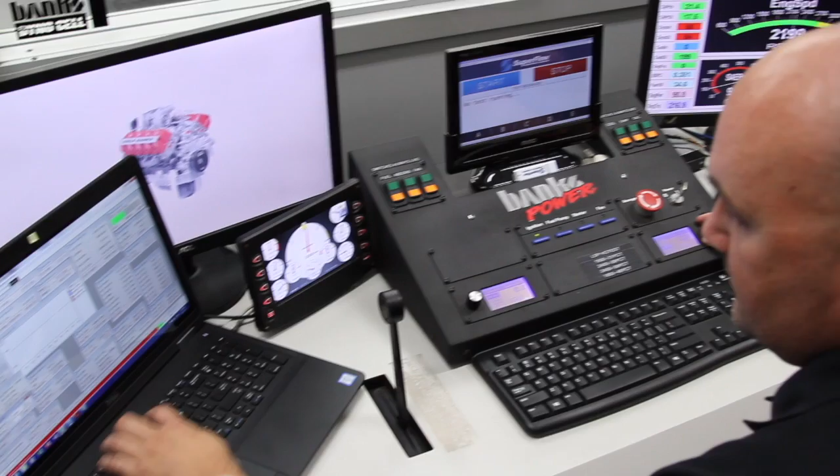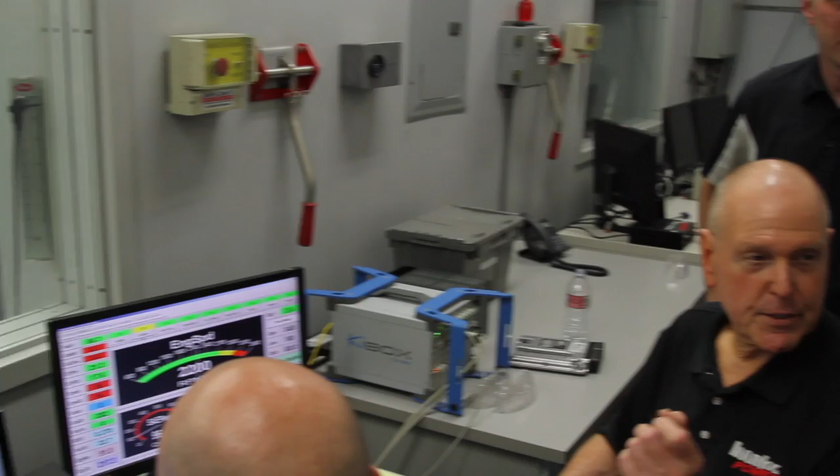We're going to run this sucker at full song. This is an L5P. We're going to run it at full song, add 2 degrees of timing, see what kind of change in cylinder pressure we get, what kind of change in turbine inlet temperature, discharge, and where the peak cylinder pressure occurs. Yes, that's where the location deal is. As we advance, we're looking at EGT. Is it going up? Is it coming down? Does it like it? Right. And it'll tell us in a variety of ways.

We're going to do it with constant fuel rate and just move the timing around and kind of watch how everything reacts to that. I mean, you're going to get to be a dyno operator for a day. No worries, Aaron. And you get to do it the rest of the time, but we want to see what it's like, man. And we're at 2,800 RPM. Okay, so bring us up. Yep.

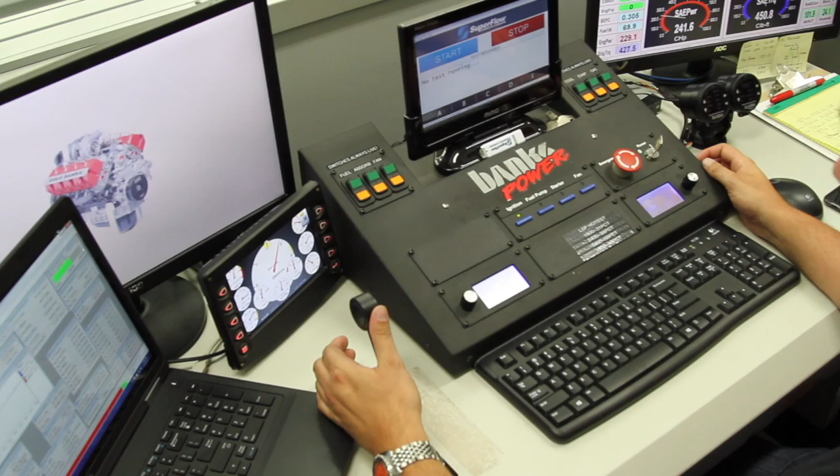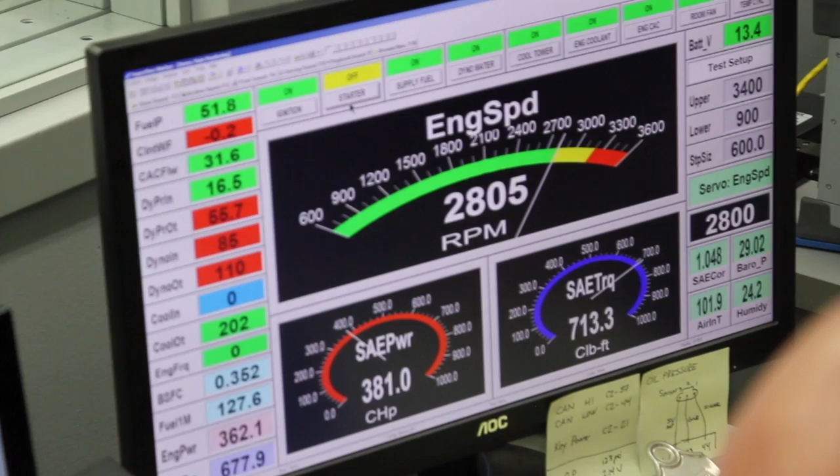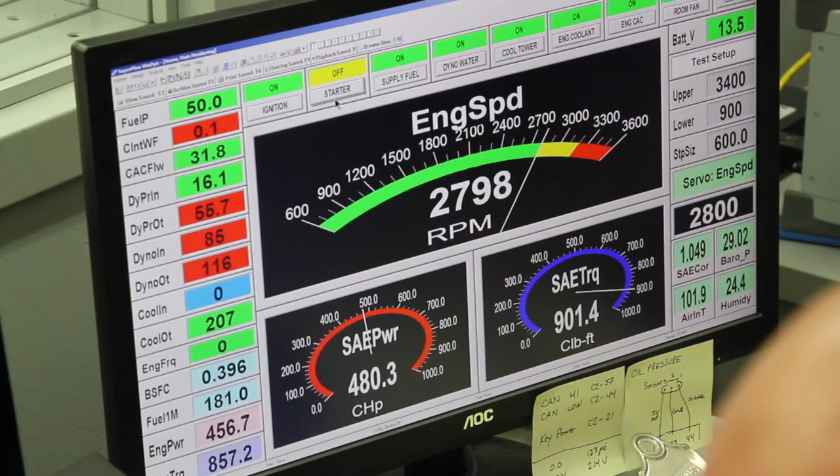Here we come on manifold air density, nearing 200. 200. 205, 210, 15, 20, 225, 230, 235, 40, 45, 250. All right. So we're up at 480 horsepower right now.

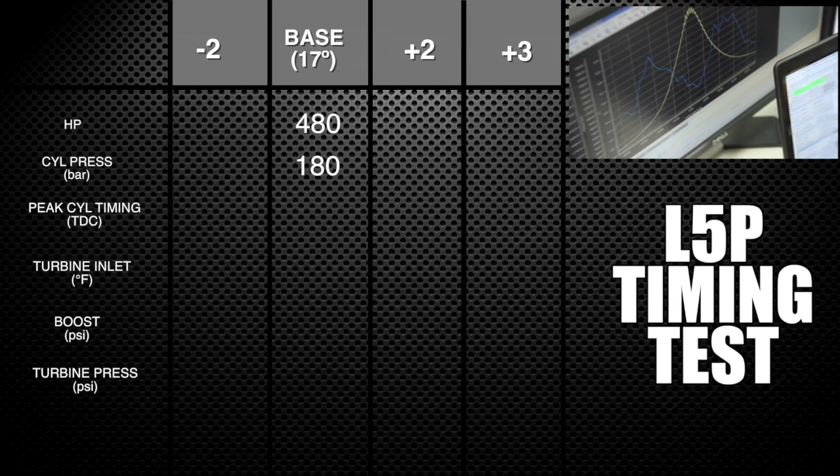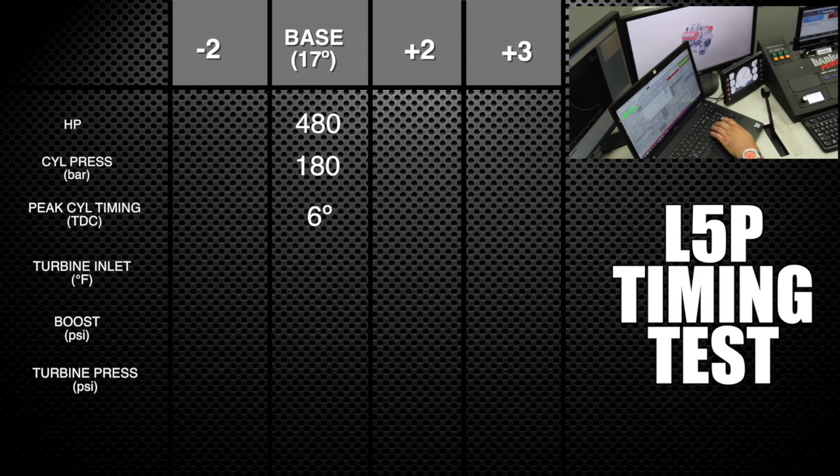All right. Starting from the left, we have our peak cylinder pressure right at 180 bar. Yeah. And it's occurring at... here's our number after top dead center here. Nominally 6. Okay. So peak cylinder pressure is right about 6 degrees after top dead center. Right. A peak of around 180. Yeah. Okay, what about our turbine inlet temperature? Turbine in? Where are you at? So we'll call it 800 degrees Celsius.

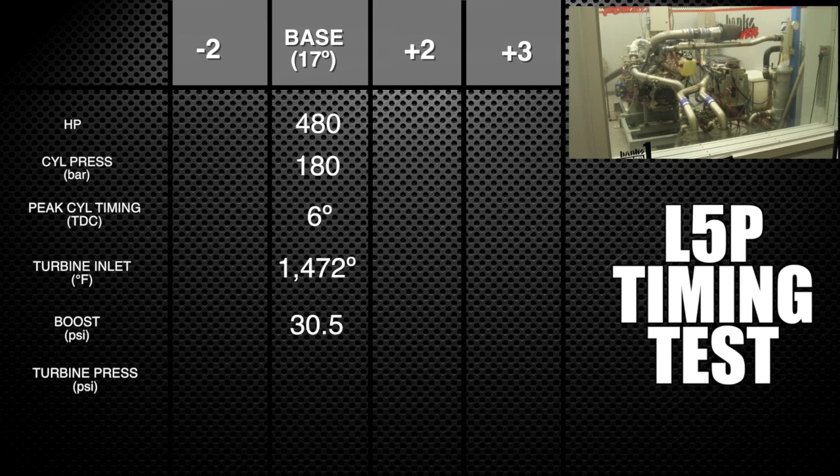Yep. And our boost pressure? Boost pressure is 30.5. 30.5. It's right here. And our turbine inlet pressure? Turbine inlet pressure is 39. 39. Okay. We're stable. I'm going to bump it. So Aaron's going to bump the timing. Okay, let's watch it. What's that? We got 2? That's 2 degrees. So that's 2 degrees at 2,800 RPM.

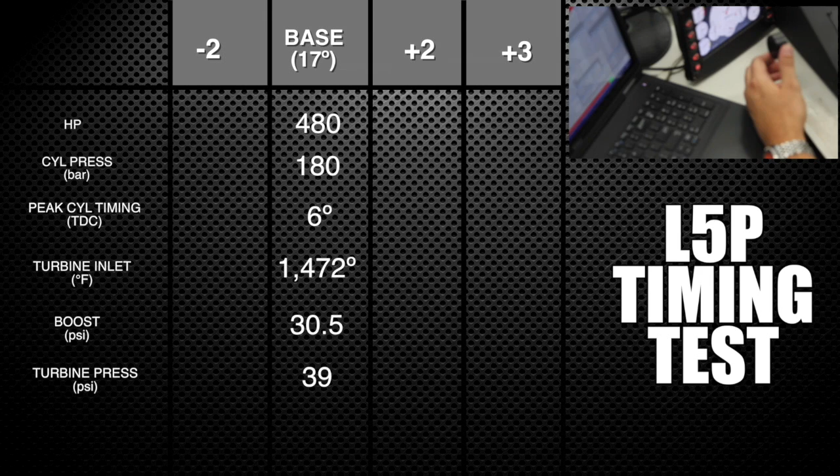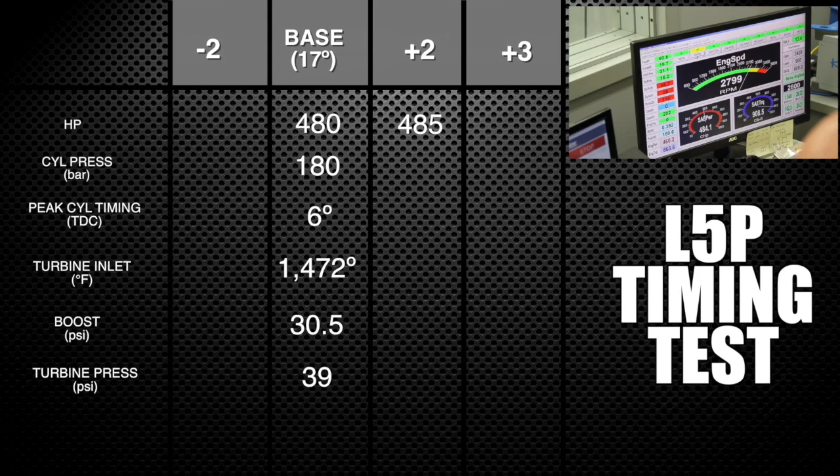What do we do for horsepower? Power is up. 5 horsepower. Yeah, what's your brake spec? Brake spec is 390. 390 brake specific fuel consumption. Okay, so we got about 4 or 5 horsepower, up to 190 bar, so we got about 10 more bar on peak cylinder pressure. We came advanced, maybe, not much. Flirting with 5 degrees, but still in between 5 and 6.

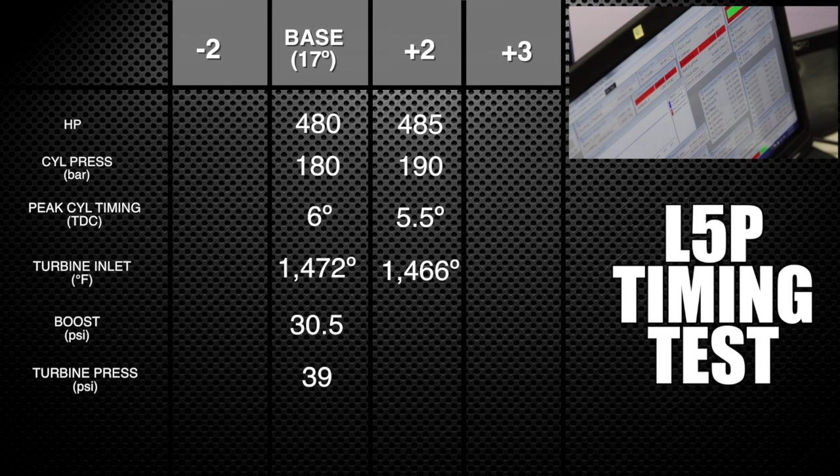Okay, what about our turbine inlet temp? Turbine inlet temp is still 797. 797, so very little change there. We're right up against it. Okay, our boost pressure is 30.8. 30.8. And our pressure in the exhaust manifold? Turbine in pressure? Turbine in pressure is 39. 39, so very little change there as well. It actually dropped it a little. Yep. You want to try 1 more degree?

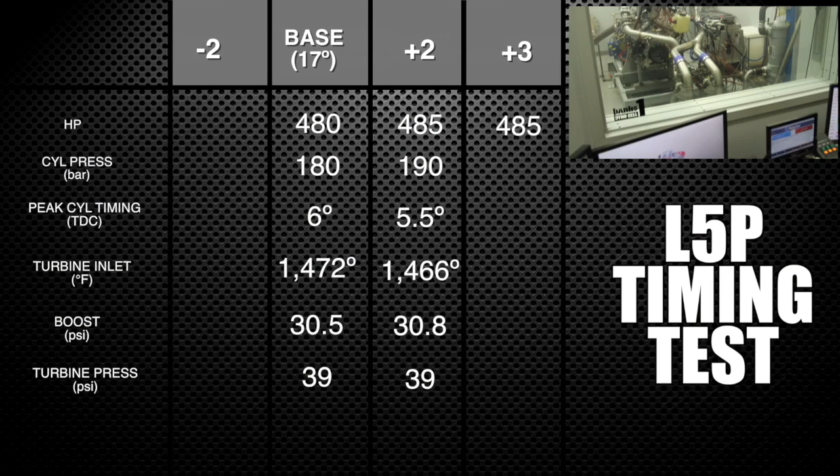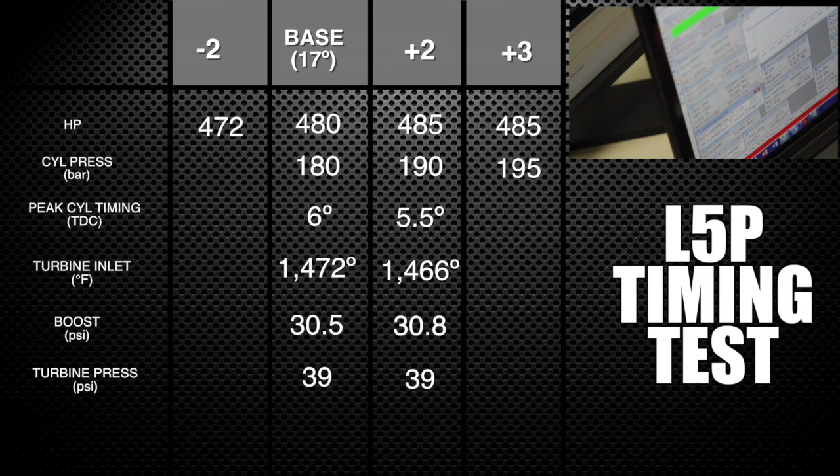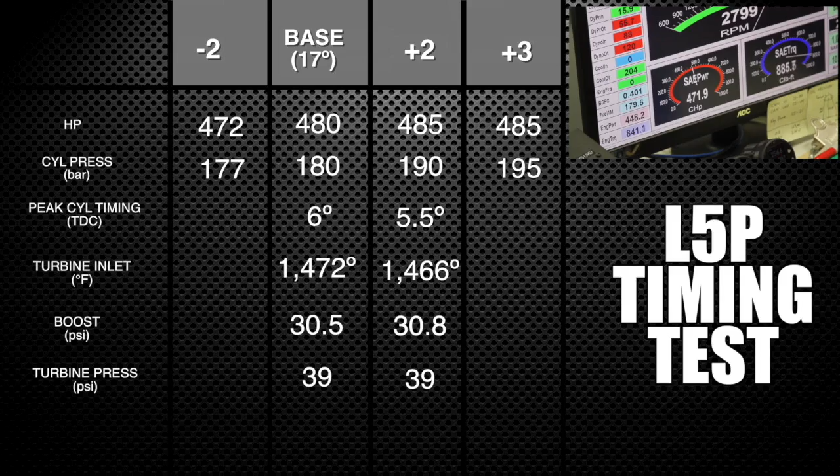So did I get that right? Adding 2 degrees added 5 horsepower, dropping 1 degree? Or did you drop 2 degrees? We dropped 2 degrees in the second. Yeah. So first we added 2, then we added 1, then we came back to 0 and subtracted 2. Gotcha. And that cost us 10 horsepower to go down 2, but gained 5 horsepower to go up 2. Yep. And when we went to 3, we got cylinder pressure. We didn't get power. Right, we're getting the cylinder pressure in the wrong spot.

That's the problem. There's a geometric thing going on in the engine that has to do with the piston, the rod, and the angle between the rod and the crank arm. Those 2 angles are constantly changing. Yep. So when it's all stacked straight up at top dead center, the piston has no mechanical advantage over the crank. Okay. As the crank turns, the rod follows it, the piston's falling. So it's constantly changing the mechanical advantage between this vertical center line of the piston through the wrist pin to the angle of the rod relative to that, and then from the rod relative to the crank.

So when the crank and rod are 90 degrees to each other, you've got maximum mechanical advantage over the crank, but you may have lost some of it with the angle from the piston. So this cylinder pressure lets us find, with that bore and that stroke, the right timing and the most efficient. Most efficient timing, the best balance. Exactly. Let's say we take it stupid, right? We push timing way advanced, cylinder pressure goes way out of spec, right? Head gaskets, bearing failure. All sorts of bad stuff.